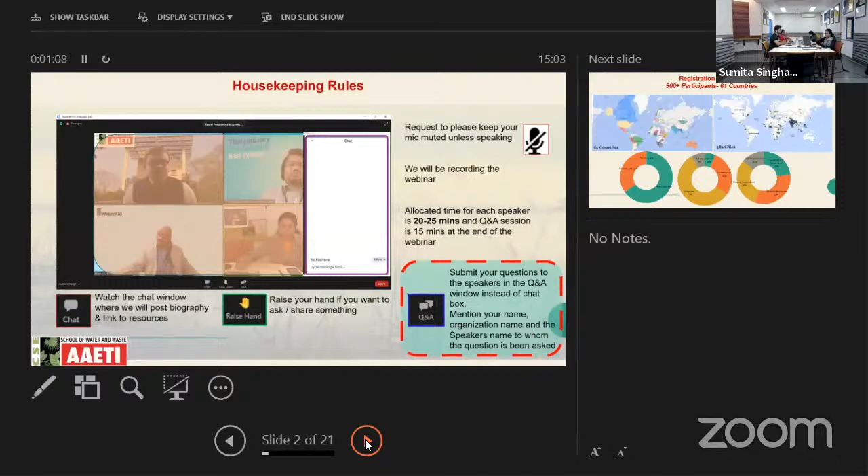So, I will also take it quickly through the registration statistics.

We got a very overwhelming response for the webinar. We have received 900 plus registrations for today's webinar, from 61 countries all around the world and 381 cities. If I further break down the registration statistics, we have approximately 65% male candidates, followed by 35% female candidates. And the majority of the participants' background is from engineering, followed by academicians.

And various types of diverse organizations are having registrations. Mostly from academic institutions, followed by private organizations and government departments. And equally, we have participation from NGOs and civil society.

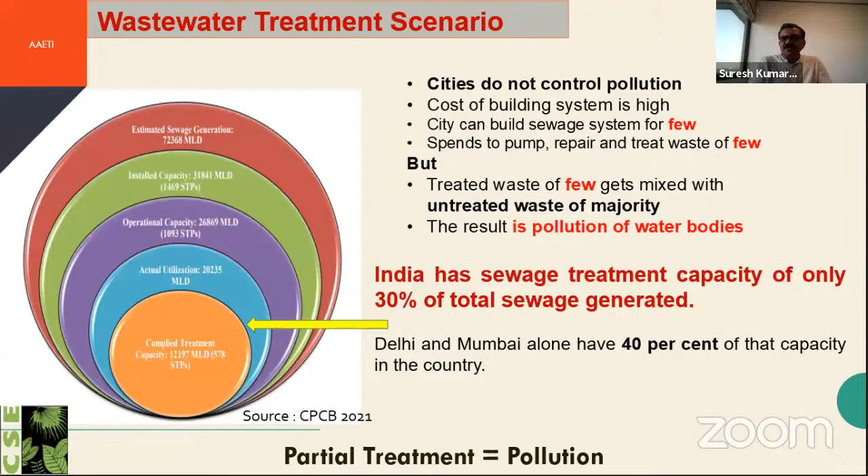So the result is that because of the huge quantities of sewage being untreated, it is disposed of in land and water environments, and pollution is a common phenomenon. CSE has been researching in this area of water and sanitation for over 3 decades, and we published our understanding of water and sanitation in a book 7 years ago, Excreta Matters. We found that there is a conventional way: you try to bring water into the city, store, divert, pump, and treat it, and we go further and further away as a village becomes a town and a town becomes a city.

For sewage also, we have the same practice: we try to pump, divert, treat, and dump the sewage outside the city. This is the current paradigm largely.

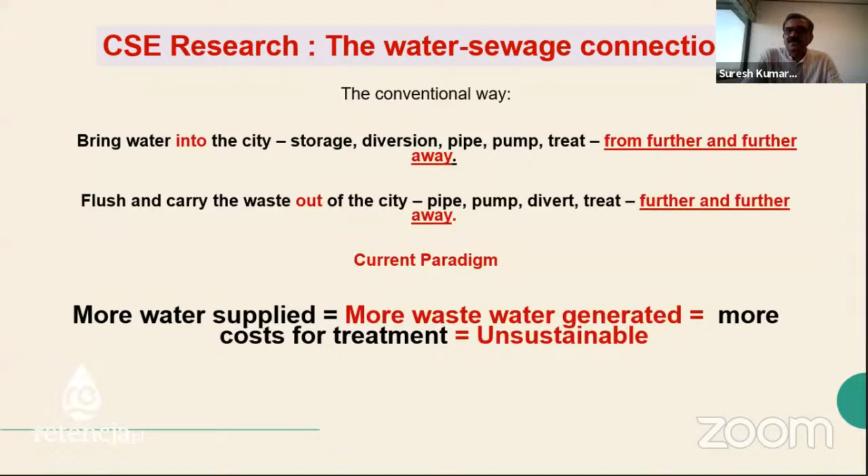However, in the last few years, we have seen a lot of good practices happening, which we will talk about in this webinar. But the conventional paradigm is to supply more water, augment more water, which results in more wastewater getting generated, and wastewater treatment needs more resources. This is becoming an unsustainable proposal.

Today's focus is the Ganga Basin, and we are doing this as part of a project with National Mission Clean Ganga, where we have 2,000 plus statutory towns. Urban built-up area has increased extensively, and we have river flow drying up at some places. Ponds and lakes are deteriorating, and there is inadequate sewage treatment, including conveyance and reuse of treated wastewater.

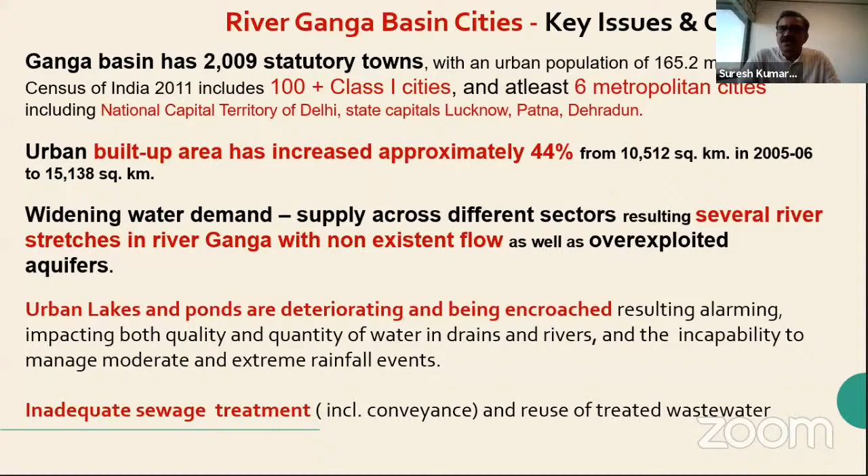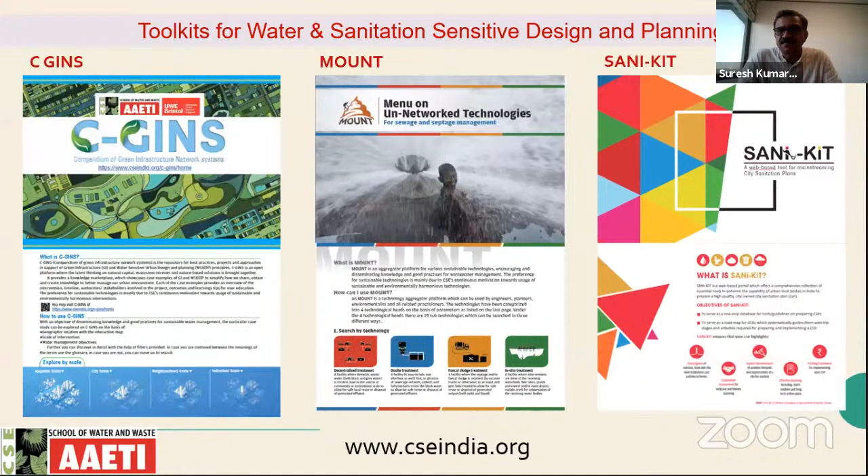We have developed, over the last few years, case studies which we have documented in a web compendium showing how you can decentralize the way you treat sewage and use it for local purposes. We have identified today's speakers whose case studies are documented in this web compendium called MOUNT, Menu on Un-Networked Technologies. So we are very excited.

This proposal we are putting together is working with NMCG to make Ganga Basin cities water sensitive, and across India, cities to be made water sensitive. This involves components like protecting water bodies, rejuvenation of water bodies, stormwater management, water conservation at different scales, and rainwater harvesting. But one more component is that not every demand can be met through stormwater harvesting because we are a monsoon country. We also consume a lot of water, and every day we generate sewage.

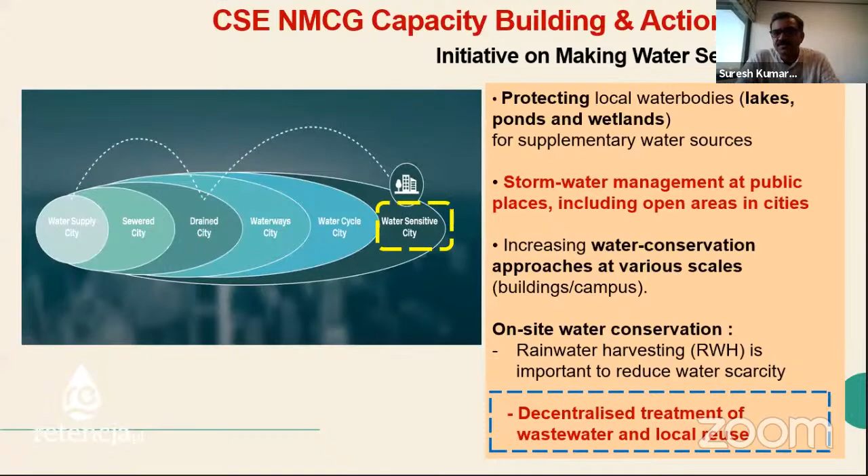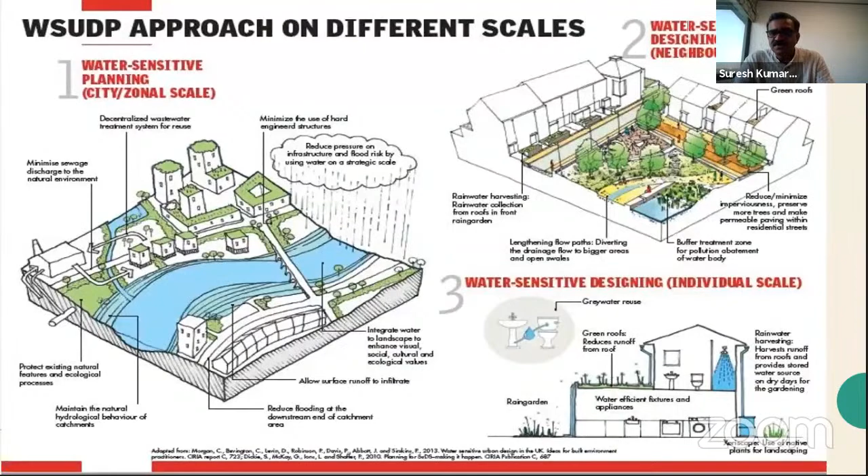So this concept includes decentralized wastewater management. We have done webinars on all other topics, but today's focus is on decentralized wastewater management, which can be done at various sub-district levels, sector levels, and neighborhood levels. This is a conceptual drawing of that.

In the program we have initiated with National Mission Clean Ganga, the aim is to have around 1,300 plus municipal functionaries involved in various national flagship programs like Amrut, Smart Cities, Swachh Bharat Mission, and Namami Gange. We would try to bring convergence of efforts for improving river health and flow. We will have a range of activities, and the current webinar is also part of that activity.

I think this was a small context setting I wanted to do before inviting Ashok Kumar Singh. Sir, we have done webinars on all other topics, but today's topic is very important. After a lot of research, we found there is interest in decentralized wastewater treatment and local reuse. Several state governments have indicated that these projects should be promoted and taken forward, but there is a need for innovation in policy and innovation in practice. So we want to hear from you, guidance and inaugural address.

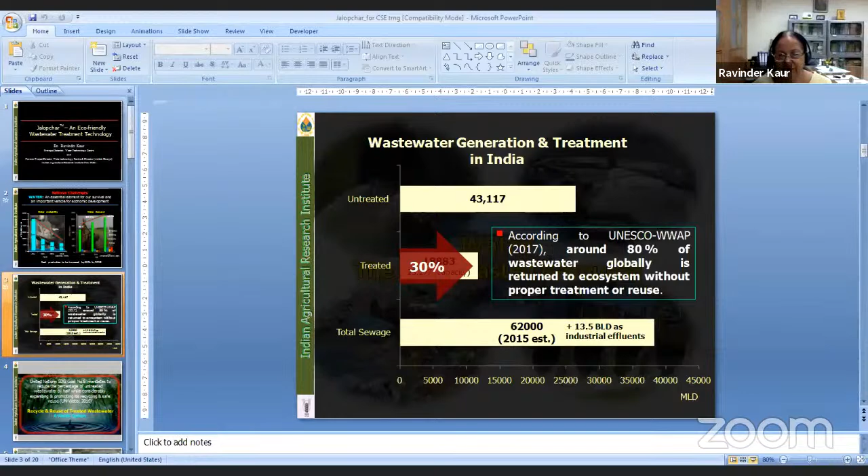Sure, thank you so much, first of all, for giving me this opportunity. Just a second, there is some issue with the presentation.

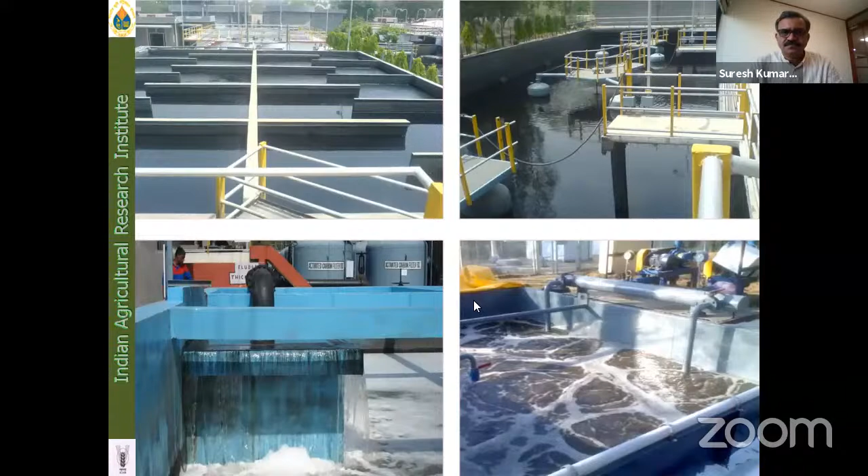Thank you very much for giving me this opportunity to share the Jalopchar technology, which is a trademark registered technology developed at Indian Agricultural Research Institute's Water Technology Center. As you can see, the technology has been labeled as an eco-friendly wastewater treatment technology and fits very well in nature-based solutions for treating wastewaters.

But before I go ahead, I would first of all like to pay my regards to Shri Ashok Kumar Singh ji, to Jalopchar ji, and to the rest of the panelists and attendees for sparing their time to listen to this technology. And now, without losing any more time, let me very quickly take you through.

So these are the normal statistics which we normally speak at various fora. Water is the most important national challenge as of now, and also in the near future, because water is an essential element for our survival and is also an important vehicle for any sort of economic development. If we talk about the food industry, it has been estimated that we need to increase food production by about 50% by around 2050.

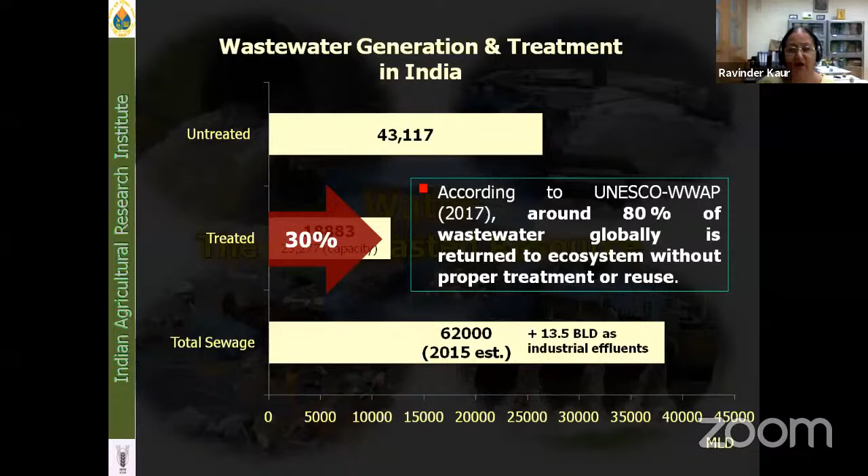So I'll not indulge into how much is generated and how much is treated, since the stage is already set by Rohila ji.

But I would again like to reinforce the statement and the mandate put up through Sustainable Development Goal number 6 by the United Nations, which clearly mandates all of us to reduce the percentage of untreated wastewater by half, and that half was by 2020, and we have already crossed 2020. We are already in 2021, and we haven't even been able to achieve that half, while considerably expanding and promoting its recycling and safe reuse.

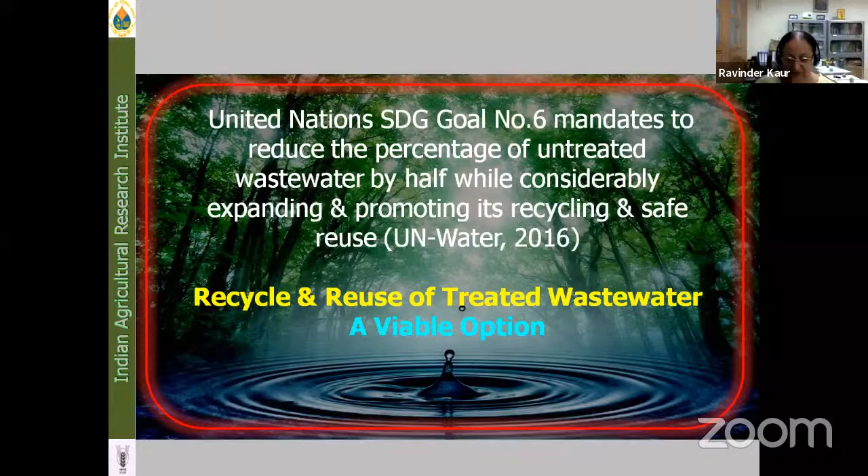But at least the good sign is that we have started thinking about it and becoming conscious about it. We have started realizing that recycle and reuse of treated wastewater is going to be a viable option in the future. We all know about the pros and cons of the conventional wastewater treatment methods.

I'll be very quick, I won't go into the different methodologies. These methods, as you can see in the picture, are commonly used in urban setups. And we all know that they have very high energy demand and very high consumable demand, because many of them require certain precipitants, that is chemicals, and they require 24/7 aerators.

They require highly skilled manpower to operate, because if you put the chemical in the wrong pH window, then the chemical, instead of removing the pollutant, will itself become a pollutant and precipitate down, adding more pollution to the water being treated.

Now, because these technologies, which are generally used conventionally under urban setups, are high on energy, high on consumable demand, and high on skilled manpower demand, obviously they're very costly. So though they are able to treat water to a large extent, maybe not to full extent, but to a large extent, depending upon the pollutant to be treated and the technology adopted...

They are also coupled with the generation of a huge amount of hazardous sludge, because any aerobic technology leads to a lot of hazardous sludge generation. So we treat the water, but we have a mountain load of sludge on the other hand. So we get rid of one problem, but create another.

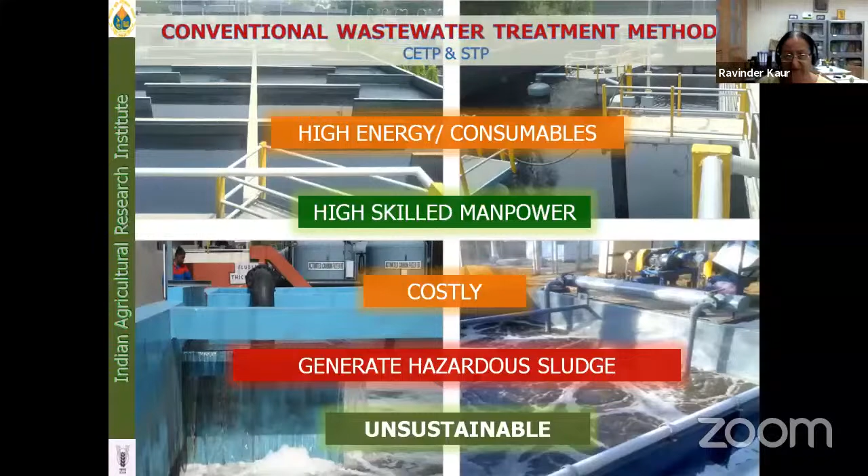So I haven't included that slide in order to take care of time. In a nutshell, though we have the technology in place, it stands out as highly, highly unsustainable because of these reasons. Now, let's change our focus from the urban setup to the peri-urban or rural areas or small towns, as Mr...

Ashok Kumarji very nicely elaborated in his opening statements that septic tanks are already there in the rural setup, so we do have a technology which can take care of wastewaters. But if you look at this matrix table, which is a single slide I've prepared, there are broadly only two types of wastewater treatment technologies widely available in the rural and peri-urban setups in our country. These can be classified as household systems and cluster-based systems, capable of serving multiple properties.

This particular slide shows various technologies at a household level. On the first column, you can see these comprise septic tanks, anaerobic baffled reactors, soak pits, leach pits, magic pits, and some high-ended innovated counterparts of septic tanks integrated with anaerobic baffled reactors, comprising natural or synthetic filters, which can be upflow or downflow. Various variants are there, so I won't indulge in the technical part.

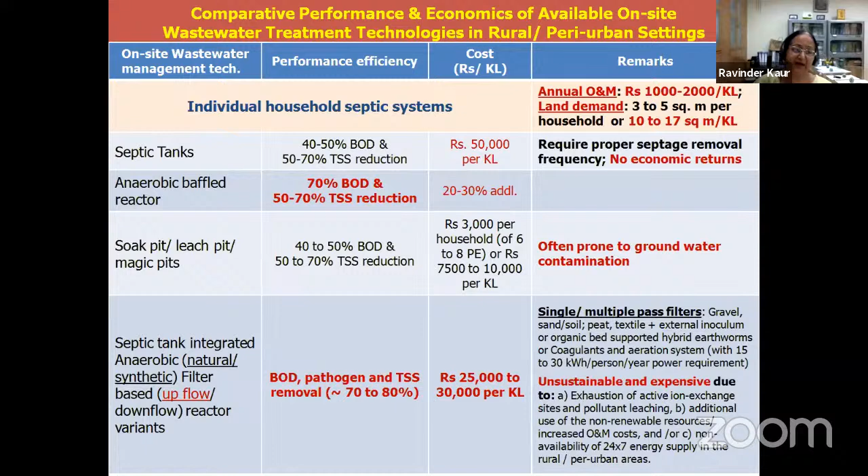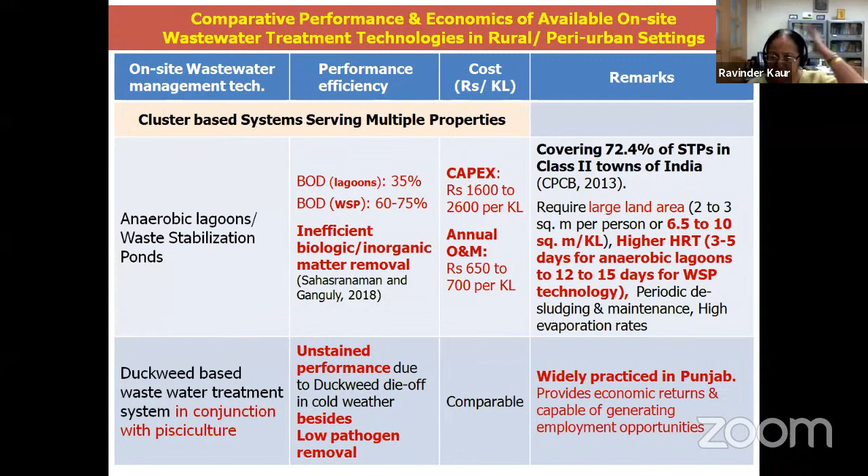Since there is paucity of time, the slide is there with everybody, you can just browse through.

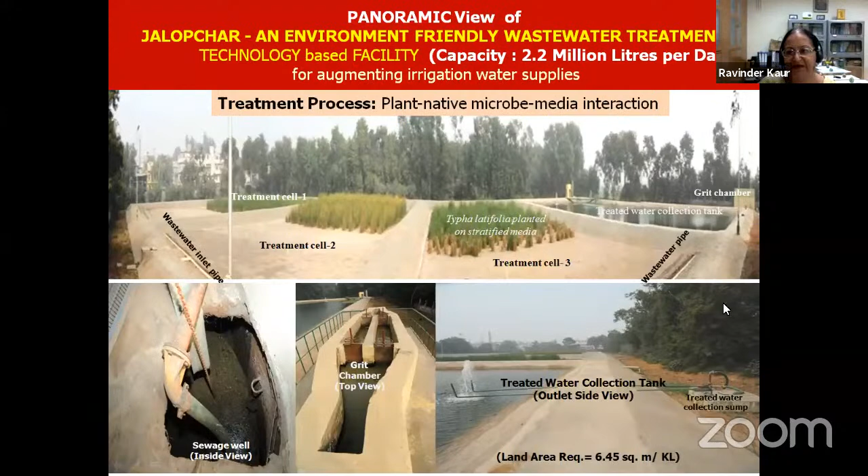And you can see here what is the state of the water - whole process is plant-microbe-media interaction dependent. If we start from the sewage well, these are the three treatment cells here, and this is the quality of the treated water. I'll expand more. The facility you are seeing is capable of treating about 2.2 million liters of water daily, and the treated waters are being used for irrigation in the IARI experimental farms.

These are some of the assets connected with the Jalopchar technology. If you look at the performance efficiency, we have been monitoring the system since 2011-12 when it was established till date, 2021. What we have observed is that it is capable of removing turbidity by 90 to 99%, pathogen load by 5 log reduction, that is 99.8 to 99.9%, BOD from 78 to 88% - these are all long-term averages, but at times these values go as high as 92, 93, 94% also. Metals, depending on concentration levels and type, 57 to 100%, nitrate phosphates from 30 to 57%.

As a result, the water we get is metal and pathogen free, and therefore the irrigation water being pathogen and metal free, our produce is also metal and pathogen free. So basically it has great potential in generating good economic value for the land being utilized. CapEx is about 5,500 to 6,500 per KL, and O&M ranges from about rupees 200 to 250 per KL.

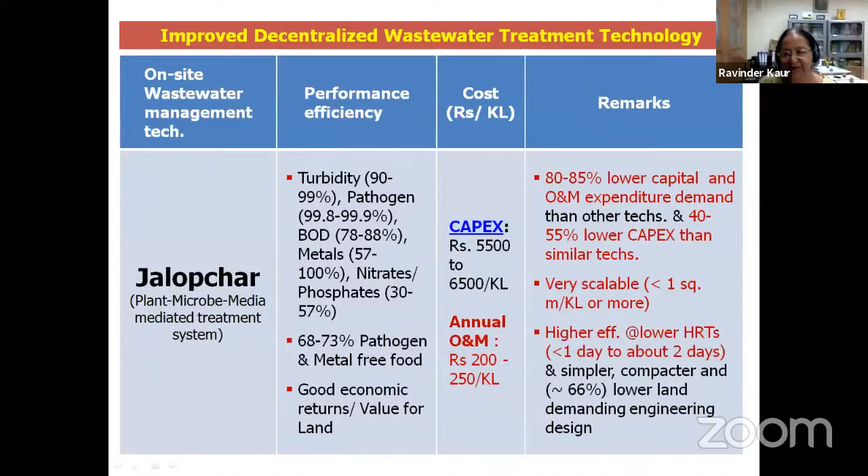I'll not indulge into the rest of the things. Maybe I'll cover all those during the question answering session.

Besides treating all these different contaminants which I just illustrated, the technology is also capable of getting rid of PAHs, PCBs, surfactants. There are two designs we have developed, horizontal and vertical. Vertical fits well where land is a constraint, horizontal where land is not a constraint. Comparing the two, horizontal designs seem to perform much better than vertical ones, but vertical ones can also be case-designed as per site-specific conditions to perform as well as horizontal.

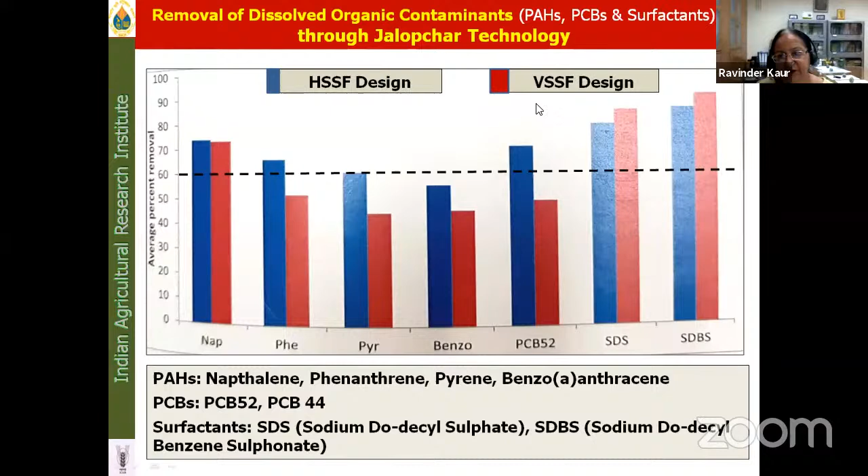So we did some ecological footprint and sustainability investigation of the implemented solution, the Jalopchar technology, vis-a-vis the conventional technology, and found that this Jalopchar technology exerts 33 times lesser stress on the environment and is about 1,500 times more sustainable. All that was adjudged in terms of a number of emergy indices which I don't have time to explain, so I will just be conveying the message.

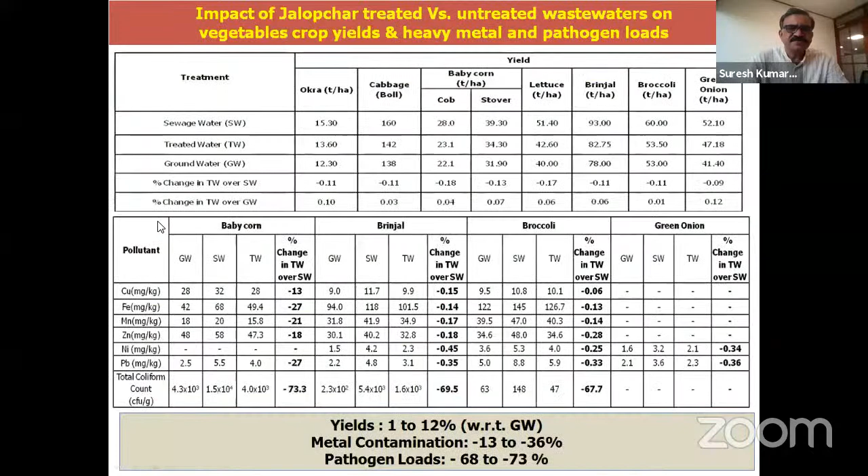Very interesting - if you look at the food production impacts, that is, the impact on soil health, crop health, productivity, all that we have done. In this slide I've tried to put the yield and metal status of the produce generated from such treated waters vis-a-vis sewage waters, vis-a-vis normal groundwaters.

There is a normal belief, even among farmers, that if we put dirty water (ganda pani) in the agricultural fields, we get higher yield. And we observed the same thing - the sewage water was definitely associated every time with higher yield.

Since last 10 years we have been doing this - for the first 5 years we had a paddy-wheat crop rotation. For the next 5 years, around the year vegetable production, because mostly in such waters farmers prefer to grow high value, low volume crops like vegetables - okra, cabbage, baby corn, lettuce, brinjal, broccoli, green onion.

Invariably over all these years, we found that sewage gives more yield than groundwater and treated water, but the treated water could give yields in between ground and sewage waters. So there was about 1 to 12% yield gain with even the treated waters over the groundwaters.

But if you look at the metal contamination and pathogen load, the treated waters as compared to sewage waters were observed to have about 13 to 36% less metal contamination and 68 to 73% less pathogen load.

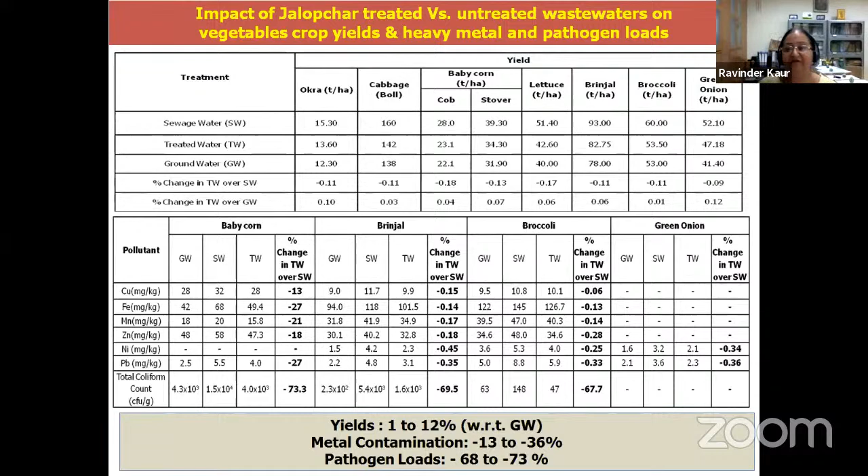Now this was when we were growing these crops on historically sewage-irrigated plots. Had we applied these waters on virgin soils which were historically not irrigated by sewage waters, the metal contamination load would have been further reduced.

We also tried to practice aquaculture on our treated waters. This is a treated water collection tank of our facility, of which I gave you a panoramic view. In this facility's treated waters, we grew pangasius fish, a commercial grade fish.

We found that with these waters, without any additional feed incorporation - we incorporated just less than 50% of the fish feed - we got about 3.5 tons per hectare of fish yield, which was far more than the national average of 2.5 tons per hectare.

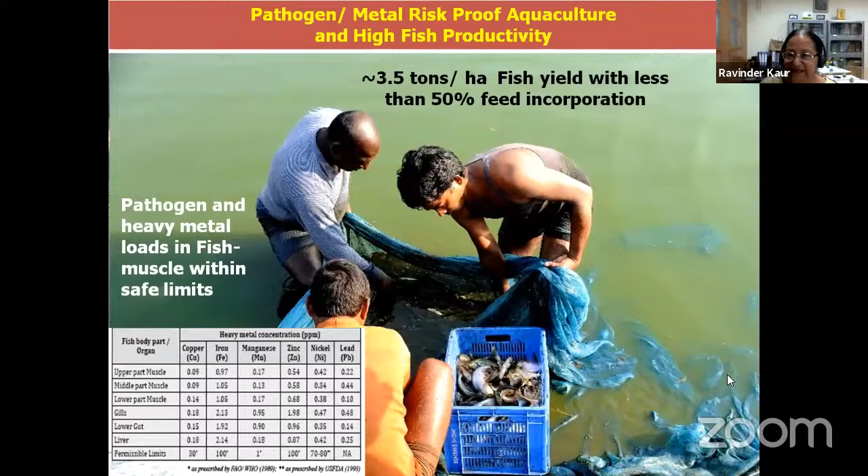And this fish was pathogen free, having zero E. coli and none of the other pathogens, so it was consumer safe - even the food was consumer safe.

There are other benefits associated with this Jalopchar based wastewater treatment technology. One is that per se for treatment it doesn't need any energy - it's a zero energy based treatment because we don't use 24/7 aerators anywhere. The plants themselves have hollow stems and aerenchymatous leaves, and they are quite adroit and skilled at harnessing local oxygen, locally aerating their rhizospheric zone.

I won't get into the science because then I'll lose the focus. Also, we don't apply any chemical. We have never faced any problem connected with the sludge, so it's a zero sludge problem. Rest of the things I have already mentioned in the previous slides.

So we wanted to make this system even more sustainable, so that we don't have to go to the stakeholder and say, this is a good thing, do this and it will work.

We integrated it with good business models. One was to harvest these wetland vegetation. We did a lot of R&D on the impact of harvesting on the pollution reduction efficiency of such systems, and found that it rather improves the reduction efficiency further, giving a big boost. So there is a lot of R&D which we have done on each and every question.

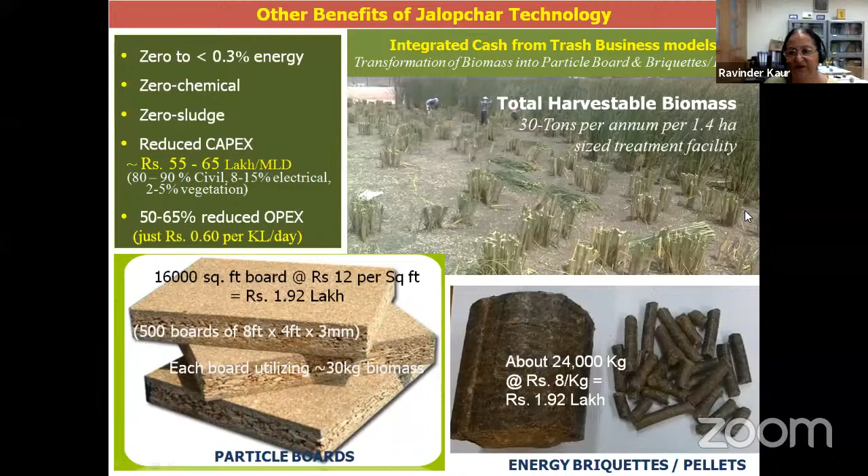We also touched upon the circular economy and business models, as indicated very briefly by Mr. Ashok Kumarji in his opening remarks. This technology was recommended in 2014 for national level adoption and implementation by the Parliamentary Standing Committee on Agriculture.

It also managed to fetch the prestigious civilian award, the SKOCH Order of Merit, and we secured a platinum award. In fact, this was rated even higher than a space technology, which was very astonishing for all of us. A rocket-based technology being compared with wastewater treatment technology, and us getting the platinum award, was very, very encouraging for all of us.

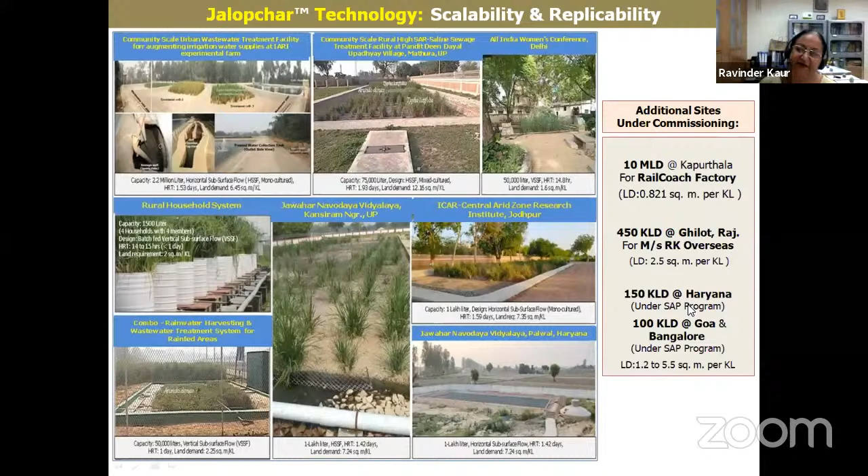As regards its scalability and replicability, I have often heard people saying that these nature-based technologies are very land demanding, and this is a main logic given for not applying them at wide and large scale. So we did R&D on that also, and tried to estimate the land area requirement of a conventional technology versus this technology.

Time doesn't permit me to go into all those statistics, but these details are available in the ebook at the ICAR website success story. We found that it is either equal to or rather less land demanding than conventional wastewater treatment technologies, and rather it is of more value for land than the conventional technologies.

For example, if you go to a normal STP site, you won't be able to stand there. That whole land catchment is smelling with foul odor and has lots of mosquitoes because of the open water surfaces and surface water bodies used for treatment. But please visit our site, and even if I tell you that this is a wastewater treatment site, you will feel that it is an eco park.

So, can you summarize it? This is the last one. This is the last one.

So if you have such technologies on either side of a river body as buffer zones, they can easily treat the wastewaters before it falls into the river. This very well fits the title of today's webinar also, and it is also very, very cheap.

I have one slide, which I haven't put here, wherein I've compared the technology in those terms also for the Ganga catchment. So if given a chance sometime, I'll be happy to share those statistics.

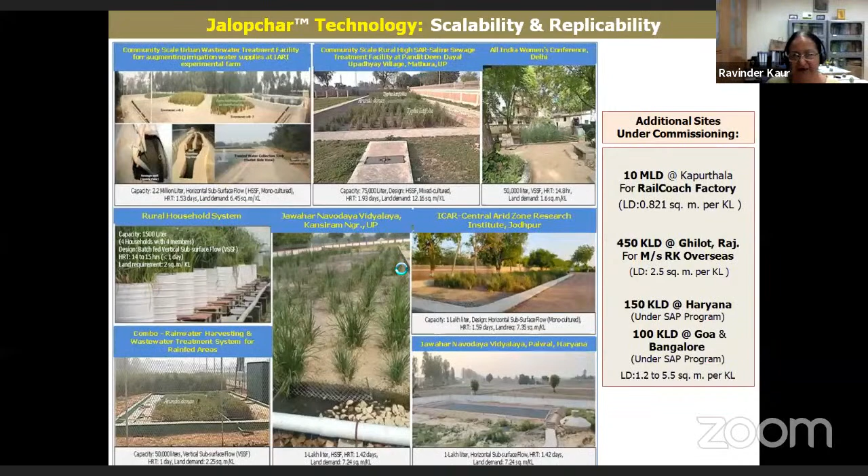Yes, it's done. Please. So thank you very much for your kind patience. I always tend to extend my presentation, sorry for that. No problem, no worry. But I think it's a very interesting presentation, and I have been to the site myself and I vouch for it - people should visit. Thank you very much for the interesting presentation.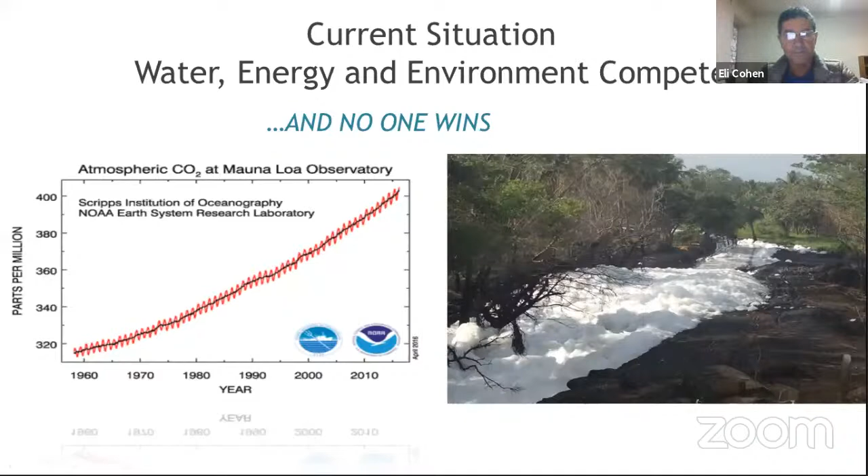And this triangle, or what used to be the triangle of the water, energy, food nexus, now we have another partner, which is the climate, come in, and we have to take it into account.

This connection, this nexus between water and energy, is very dangerous, as we all know, and it will get worse and worse the more water we treat in the conventional, common known practices. It's an amazing number, but 35% of the energy production used in cities goes for water management in different ways - supply, treatment, etc. So these are big numbers, and if we want to reverse climate change, or at least stop it, we need to do something about this factor.

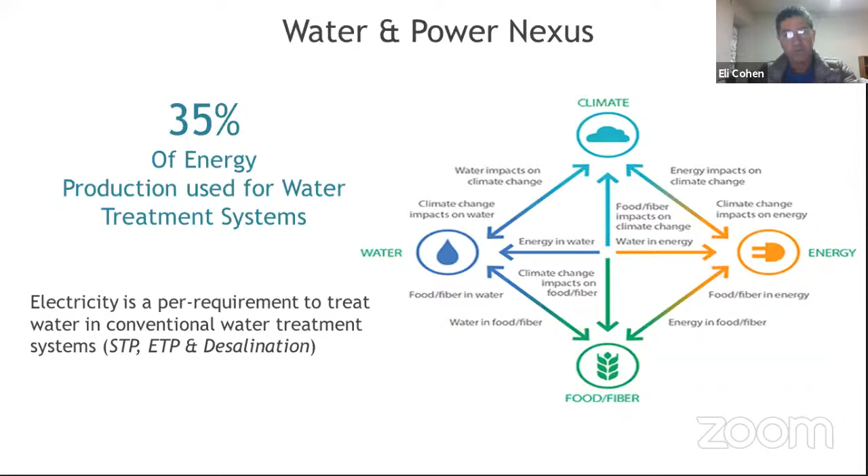And I would like to talk about the decentralization versus the centralization of the system. Just a few words of history about where it all started. The centralized system wasn't here since forever - actually it's only about 50, 60 years with us. It started in the US, as most new technologies came from in the last century, and it came in because of the fast development in the world in the last 100 years - overconsumption, overuse of water, pumping of water from the aquifers, rivers and lakes.

It caused a huge burden on the current facilities, the old type, the open lagoons, etc., and demanded a solution. There were talks in the US at that time about nature-based solutions. Things had been done, but then somehow something new came into the market - the activated sludge system, the technology-based one. Somebody came with an idea to centralize the system, send the water to one central place, and do it at big scale and with a lot of energy, like people loved to do at that time - we're talking about the 70s, 80s. People were opposing it at that time, saying it didn't make any sense. But after a short time, because of the big money involved, it began to be the mainstream, and government adopted it, and it began to be the main thing. And it's amazing how, after one decade or so, it became the only solution and spread out all over the world, and now we see it everywhere.

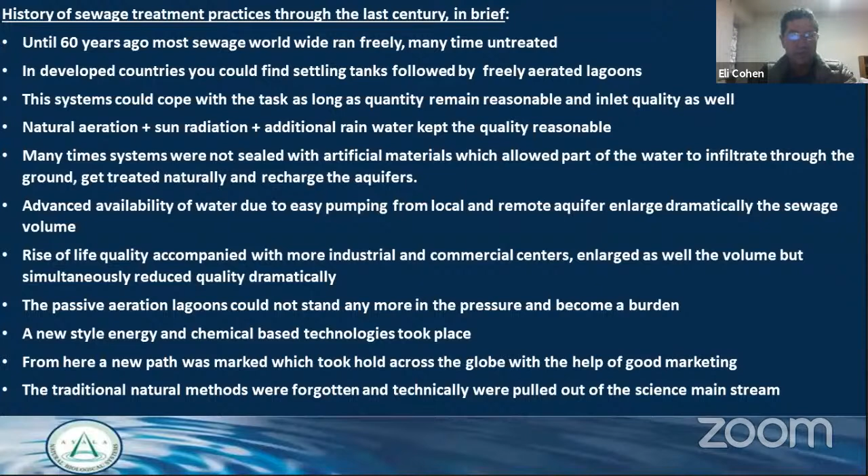And of course, the problem hasn't been solved - it's just getting worse and worse. This is just a brief history about it. Of course there's much more, but let's move forward.

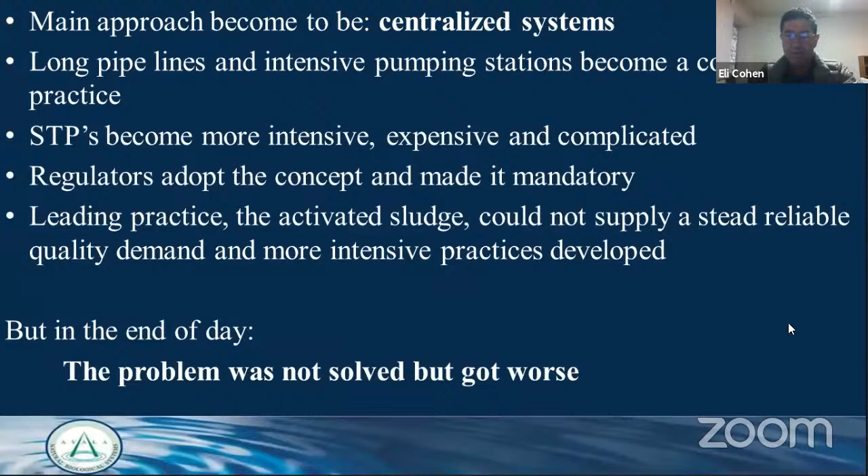So the main approach, as I said, became the centralized system, and add to it the intensive STPs. And as I said, it didn't solve the problem. So we're asking, if not centralized, why not decentralized? We can see it over here.

Because centralized systems need a lot of complex infrastructure, high energy pumping operations. It's very fragile - there's leakage from pipings which affects the aquifer. We're not even talking about colossal damage in case of earthquakes. The cost is amazing, but basically it's a huge amount of energy in the bottom line, and I'm talking about this nexus between water and energy.

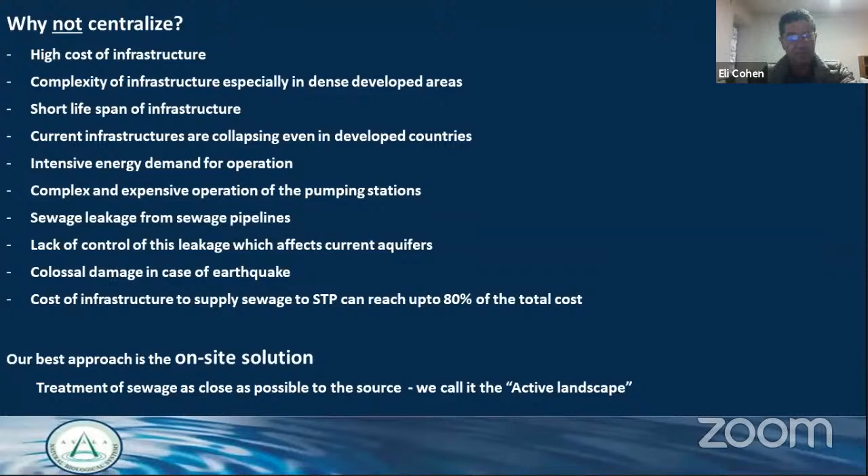Just an interesting part about this - I was involved in this. We are based in Bangalore as well, and 4 years ago, this STP, one of many established for the Bellandur Lake, cost about 640 or 600 crores for the promotion of 2 STPs near the lake, around the lake, and out of these 600 crores, 80% was for the conveyance system - piping and pumping. This is actually the relation in most systems. If you do an on-site decentralized solution, you don't need all these investments, and this makes the amazing difference.

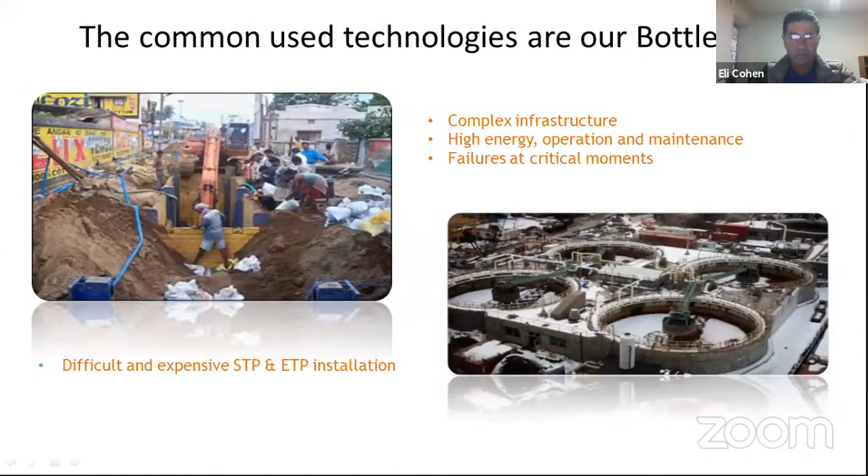And of course, we're talking about piping, and also about the final stage step, which is the STPs, which also demand a lot of maintenance and energy - a lot has been talked about and said about it in the previous talk. And this is the way it can look and work. This is a small system, for example, in the heart of Tel Aviv. But I'll show you in a minute, examples of many others in different locations.

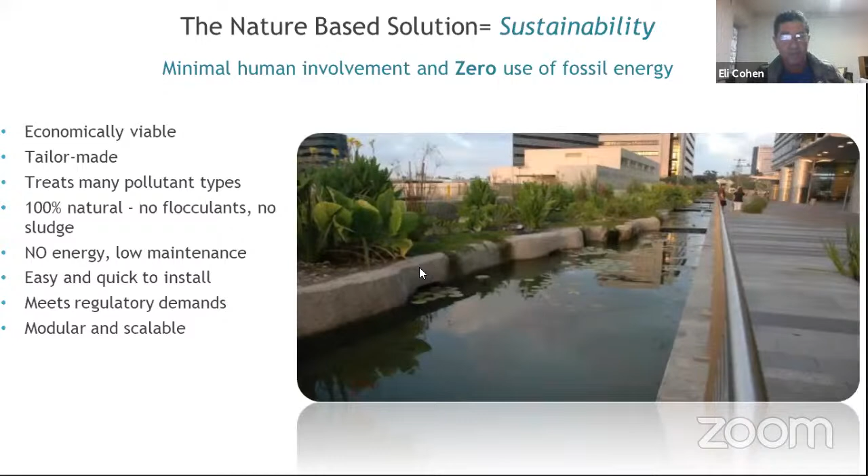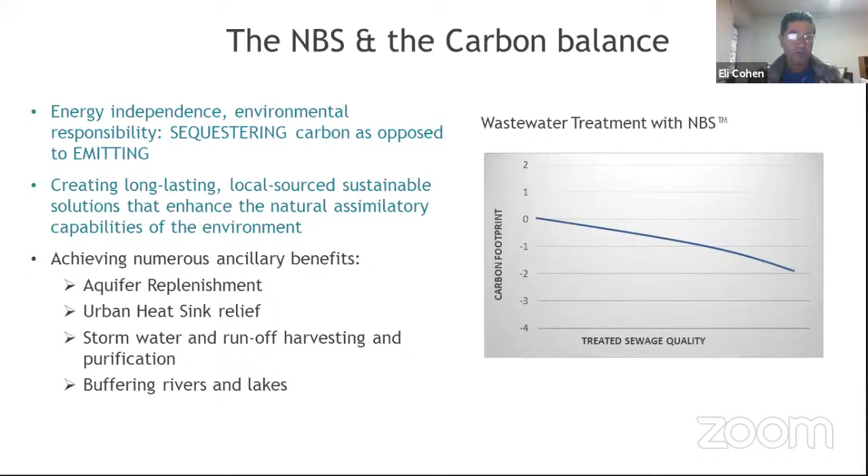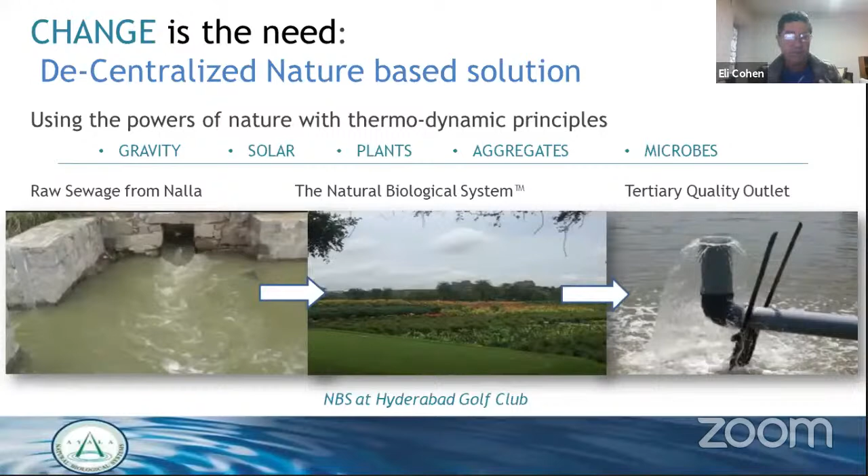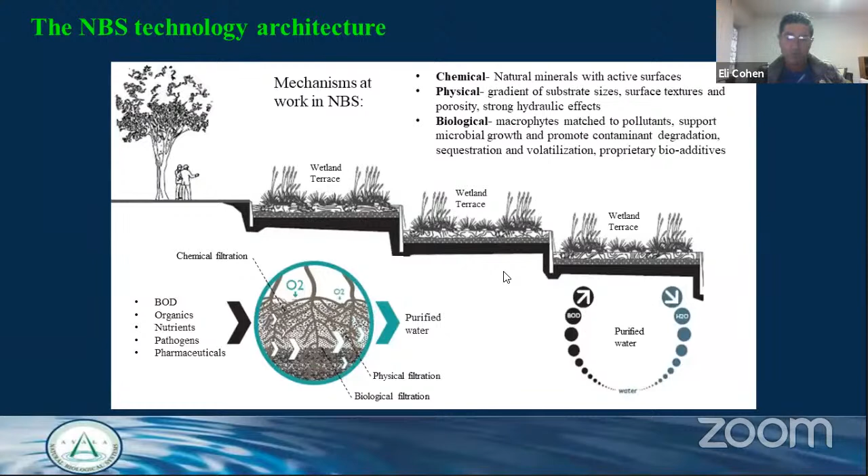And of course, I'm not even talking about the operation, byproducts, and the quality of water in the outlet, and you name it. Change is needed for sure, and decentralized nature-based solutions are the change we're looking for. Like I was saying before, it's gravity, it's solar, it's plants, it's aggregates, it's microbes - all working together, producing from this sewage Nalla through this system a very high quality water that protects the surrounding area. I won't get too much into how it works, but it's about gravity, plants, root zones, microorganisms, and sun energy.

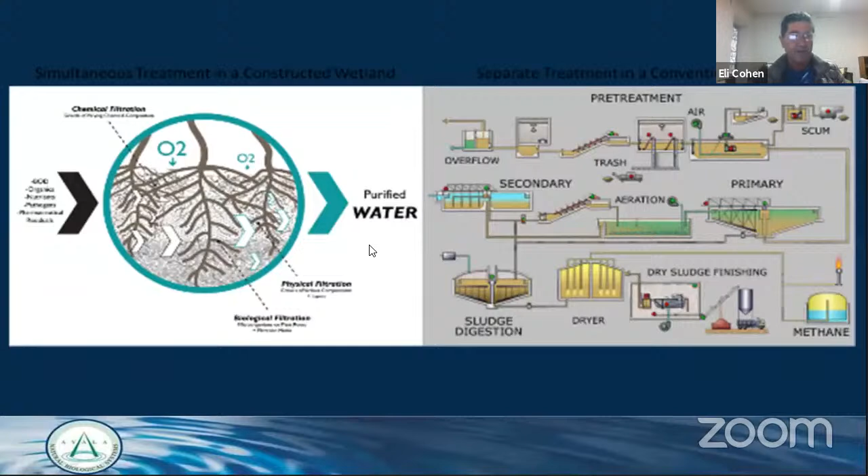But basically, this says everything - this root zone and gravity is actually equal to all what you see over here. It's amazing, you can't understand it, but this is actually what's happening. We're doing physical, biological, and chemical filtration all at once, with zero energy, zero chemicals, and the oxygen comes through the plants themselves. The output water is very, very high quality in all parameters - you have to keep it that way in all parameters.

But there is more in the NBS technology we developed - it's not only about water treatment. It's also about water harvesting on site, about harvesting, treatment, and recharging the aquifer if we want, or sending it to the river. It's about preventing flood upstream - we'll see that in a minute in one of the examples. It's about reducing carbon footprint, air purification, and of course beautification. It's a social system that lives with the people, near the people - people love it, keep it, take care of it. It's actually introducing energy and nature back to life, which many people have forgotten. This is the only way, if you think about it, to actually reverse climate change. If you ever want to do something about it, this is the only way. Going back, creating a new balance in the environment around us, using nature-based solutions is the way forward.

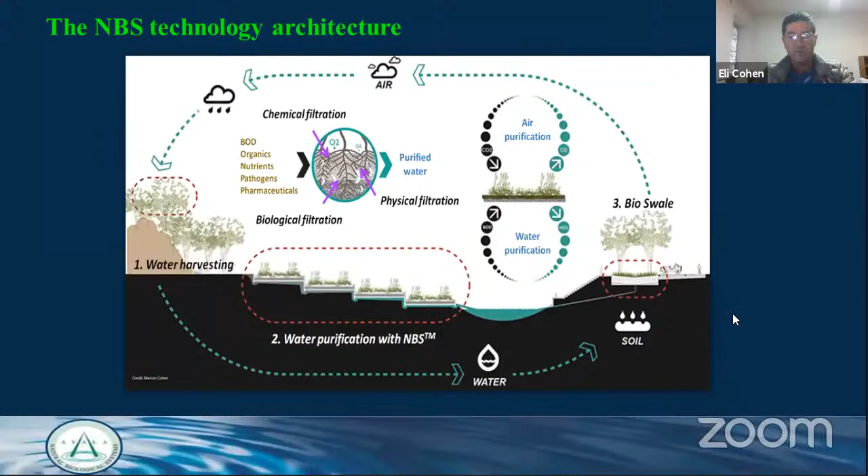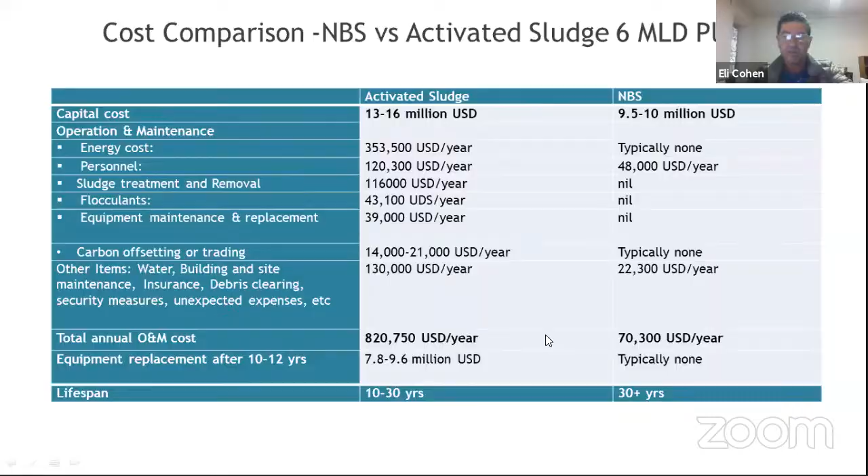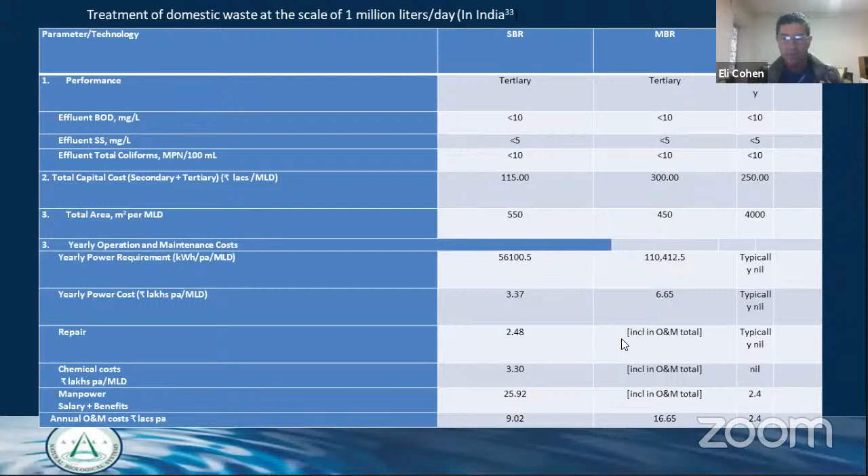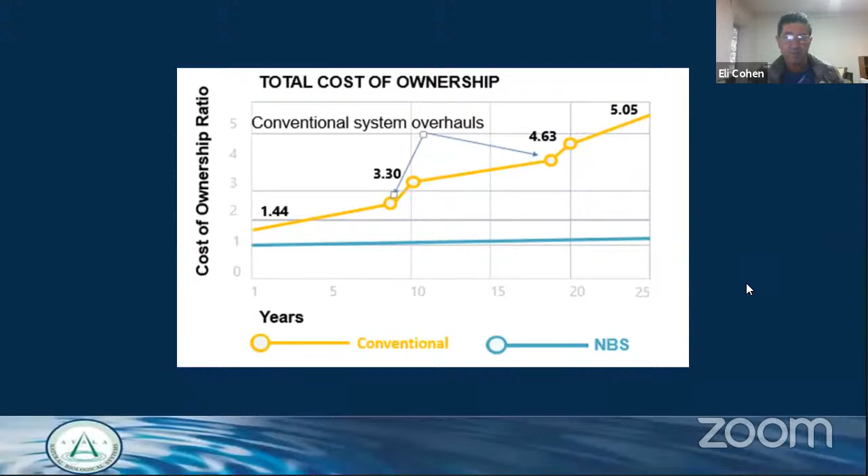Let's just see some case studies and understand that it's actually doable. Many people don't believe it can be done because we were taught and learned that only technology will play the role and do the work for us. But when I say technology, I mean man-made electro-machinery, energy-based technology, and this is not the case here. We are not against technology, just to understand - we like technology, but when we can avoid it, let's do that. And this is what we're doing.

This is an example of something not from India - I'll later go to India - but we have designed a solution for the city of Nice in the Plaine du Var Valley. This is the city of Nice, going all the way from here to the Alps, 45 kilometers. They were suffering from aquifer depletion, water quality reduction, sewage treatment that wasn't functioning, air pollution, and aqua fauna and flora that was disappearing.

They were looking for a sustainable solution, and we gave them that. They loved it and accepted it. We created this green belt and eco trail going along the valley, producing a green belt that treats the water on site, harvests it, prevents floods by holding the water upstream, recharges the aquifer, and treats sewage as part of this park, all at once.

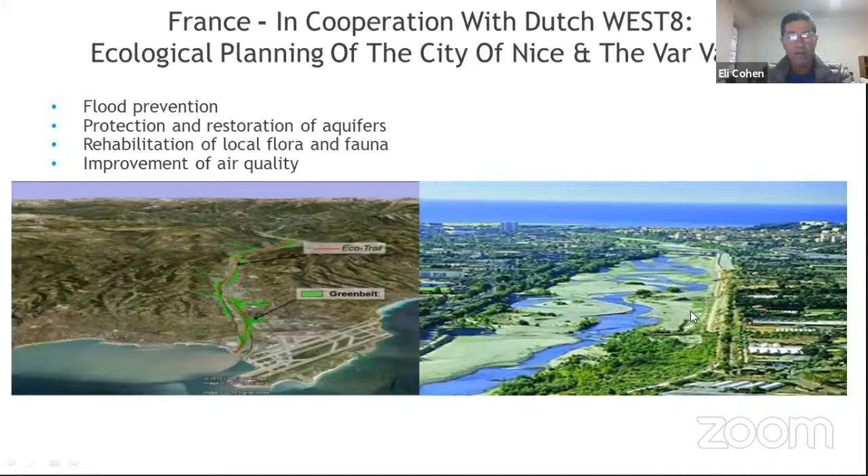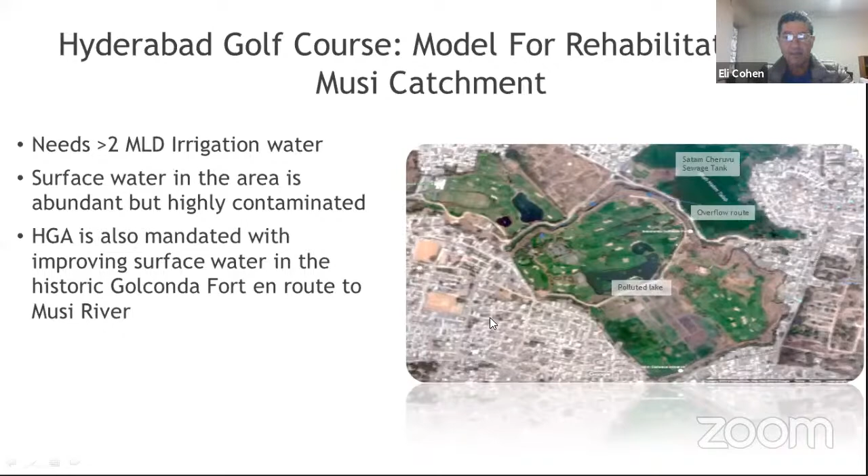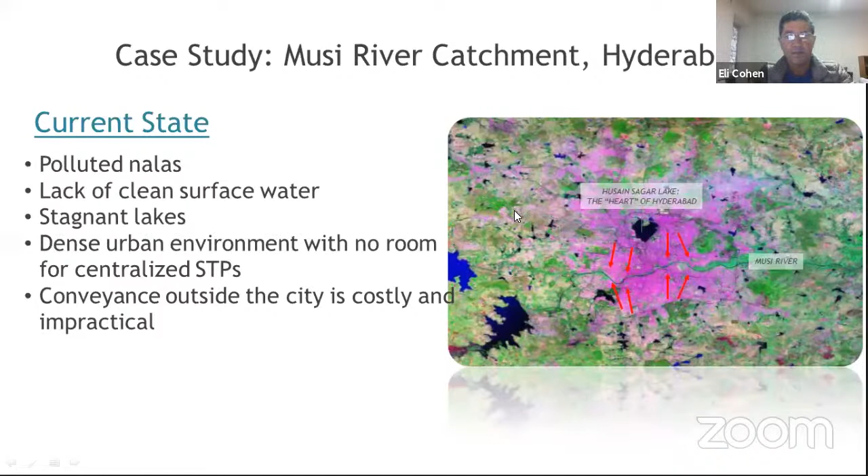I want to show you something we've been working on for 6 years already in Hyderabad, India. This system was designed for 2 million liters but today is treating 5 million liters per day. It's based in the HGA, Hyderabad Golf Association golf course, sitting on the banks of the Musi River. This Nala water is actually quite bad, taking water from neighborhoods upstream, mainly domestic, but not only. There are also dairy farms running there, and some industries, garages, etc.

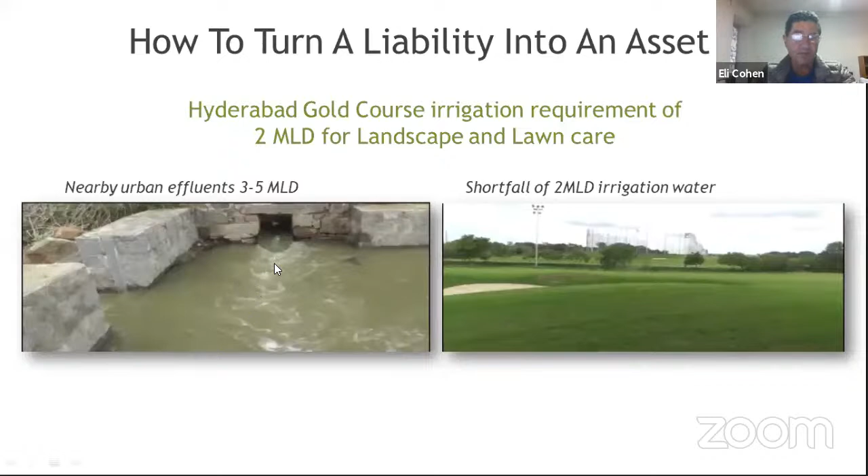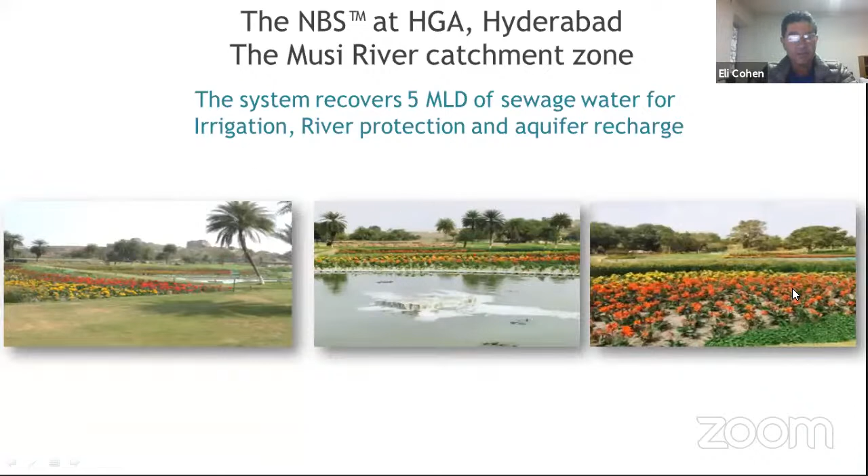The bottleneck is, in the end of the day, the water goes through the bypass, through a system that treats it, and what comes out is very, very high quality. You can see the colors of the water before and after - this picture was taken a few months ago, and people even play golf through the system. More importantly, I think this is the only golf course in India that has free, high quality water all year round, with minimal maintenance - just beautification and gardening.

It also creates a very powerful buffer zone on the Musi River. Just imagine if we do more like this along the banks of the Musi River, where sewage runs from the city into the river - we can change the face of this river. It's just a matter of decision, and the same thing can be done on the Ganga, which we were involved with years ago already. We offered it on the Ganga and in many places.

Unfortunately it didn't work out, but we can do it in factories, cities, and villages, etc. We designed something connected to the Ganga about 2 years ago for the DJB, Delhi Jal Board, on the Yamuna River, which runs to the Ganga. In this case, we designed a solution on the supplementary drain that treats sewage water coming out from all of the north part of Delhi.

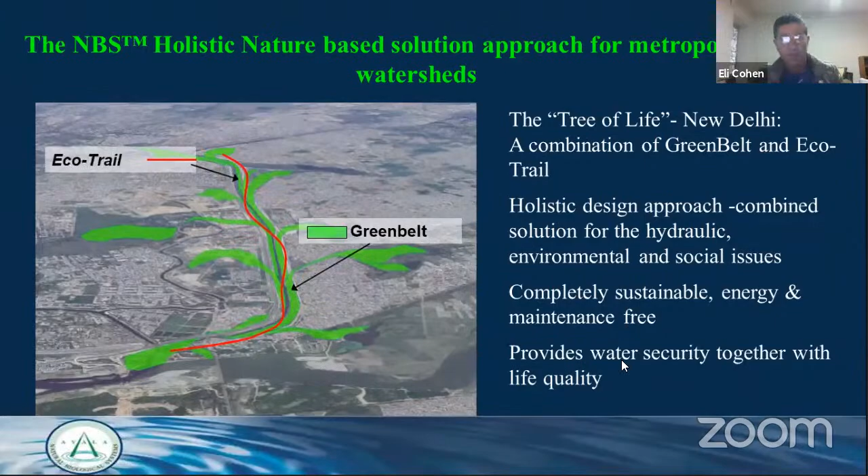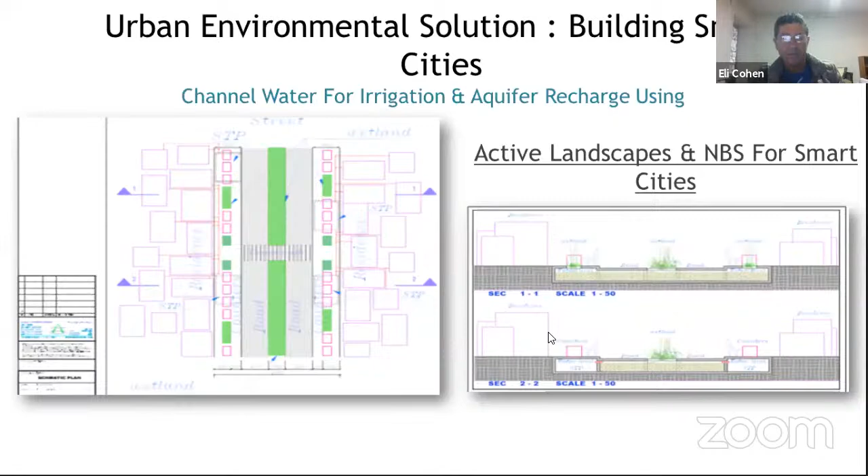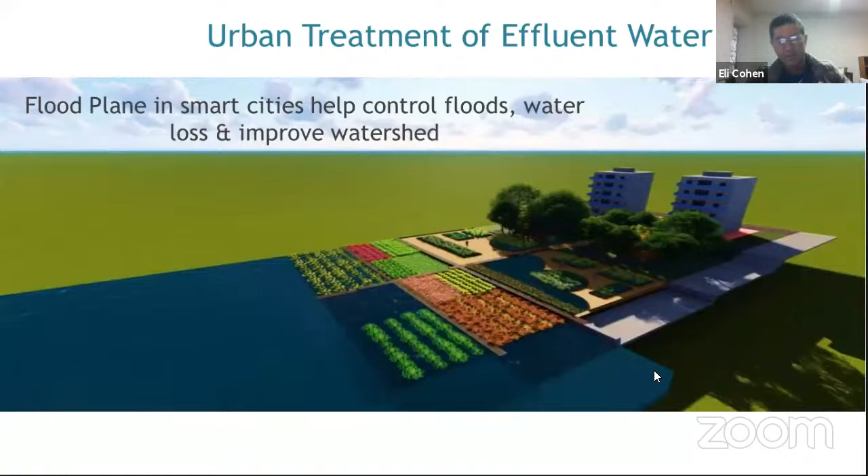This is something we've done on the Mithi River - we designed a system that's actually integrated into the slums, into the life there. You can actually drive your auto on it, and it still treats the sewage coming out from the nearby houses along the banks, in different ways, and on the floodplains. It's again all sustainable, living by itself, and gets better through the years.

This is an example, 2-3 minutes if you can just summarize. Okay, I'll keep it short. This is a neighborhood where all the sewage is being treated as part of the landscape, and later used for ornamental purposes and then irrigation.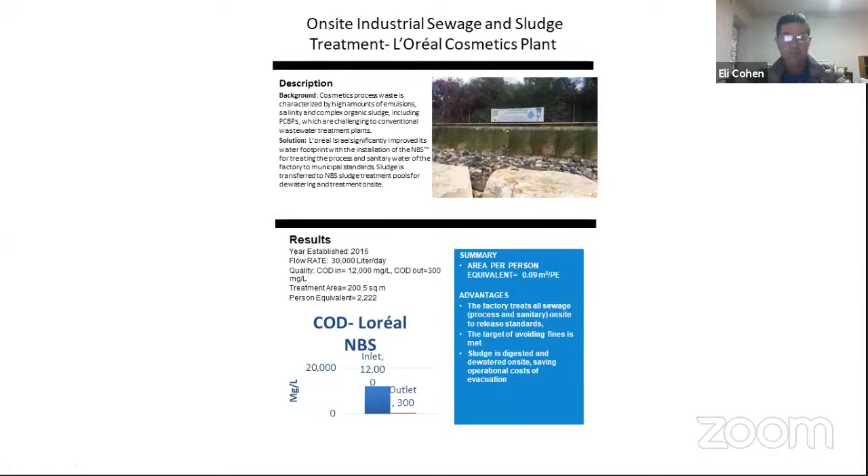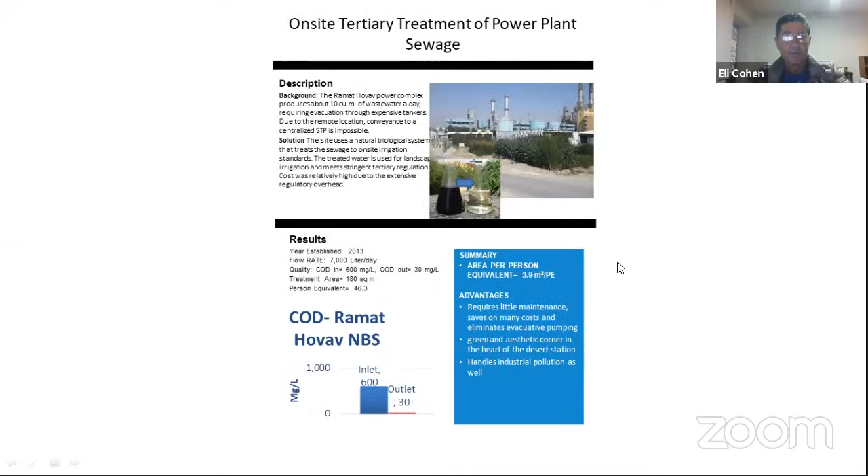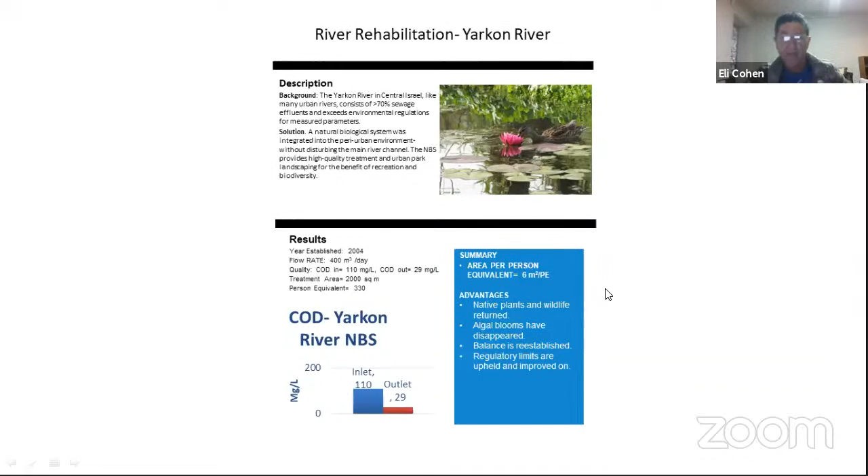Textile in Vapi, Gujarat, India, very high quality water in the outlet. Power stations working for 6 years. Rivers - this is a river in Israel working for 20 years. These days we're doing another river, a bigger one, where we treat over 25 million liters per day, very hard sewage with high fluctuations.

But this is a very important slide just before I finish. About 15 years ago, the government of India asked the IITs to write a report about the Ganga - why all the money that was put in, all the work that had been done, didn't work out.

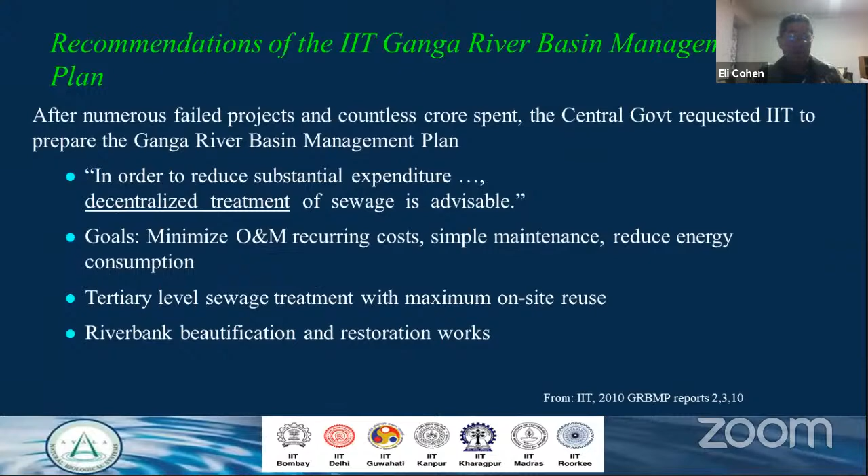And a great report was made, I think given in 2010. It's quite big, very wide, but worth reading. Look at the bottom line: after enormous failures, it says in order to reduce substantial expenses, decentralized treatment of sewage is advisable. They're actually advising very clearly a decentralized solution with goals to minimize O&M and recurring costs. They're talking about nature-based, decentralized solutions. This is a recommendation after 5 years of investigation, so this is something we have to keep in mind.

Just one word about Ayala. Ayala is a company of sustainability experts. We've been doing this nature-based solution for more than 30 years, all over the world, and we have a base in India. We've done a lot of projects here, and we are really looking forward to making a change here together with the people here. We believe that it's possible. Thank you very much.

Thank you, Eli, for a very interesting presentation with a lot of case studies which have been working for over a decade or more, and not only examples from India but abroad also. I should share that CSE has been treating its own sewage at headquarters, as well as our training center. Similarly, at the Delhi Jal Board headquarters, we have implemented decentralized wastewater treatment plants. These are working examples which clearly show they have met all regulatory conditions and have been performing as well as, or better than, conventional technologies. However, I won't say it's strictly either-or - there may be space for hybrid systems, where they work and how they work.

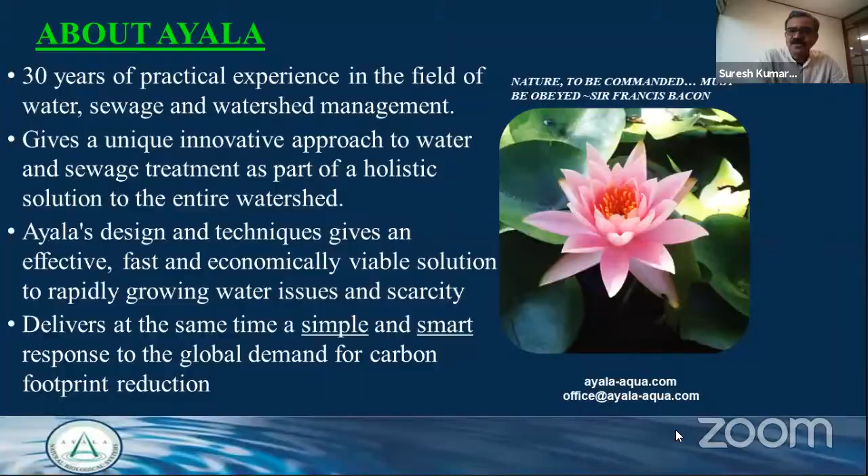Chaurasya ji, I think it's time for me to invite you, because you are leading the Swachh Bharat Mission Urban, where all small and big towns also have to take up wastewater treatment as one of the important areas. Many people have demonstrated that systems have been working for 10 years, meeting regulatory measures, so what is stopping us from that?

Thank you, Dr. Rohilla. I also thank Ashok Kumar Singh sir and Eli Cohen, because both presentations are very excellent. When I got the invitation for this webinar, it struck me that I should attend, because Swachh Bharat Mission and Amrut has been recently launched in the first half of October, and for the last 6 to 8 months we have been working on preparing guidelines, roadmap, and strategy for how to treat wastewater in a way that is affordable to our country and our people, doesn't require too high a skill level, and ensures whatever assets are created are sustained in the long run.

So keeping that in mind, whenever we were trying to get solutions under Swachh Bharat Mission, I'd like to mention we are going to more than 3,900 small ULBs having population less than 1 lakh, less than 100,000. These around 4,000 towns are not very big, organized towns, and often because of lack of awareness, lack of finances, and lack of policy and other support, their wastewater management could not be taken up with the force it should have been in the past. Now, once the ministry put focus on water supply and solid waste under Amrut and SBM 1, under SBM 2 this wastewater has come as a very focused area.